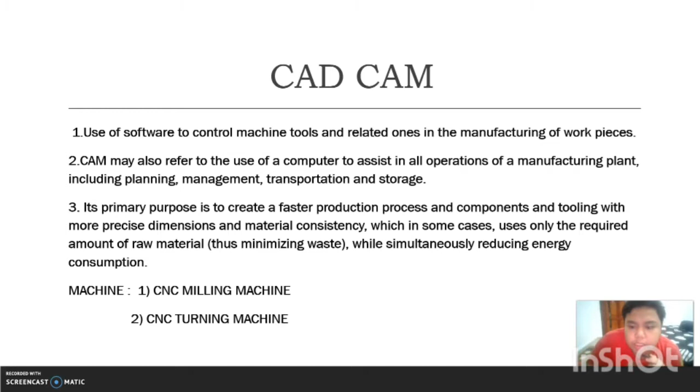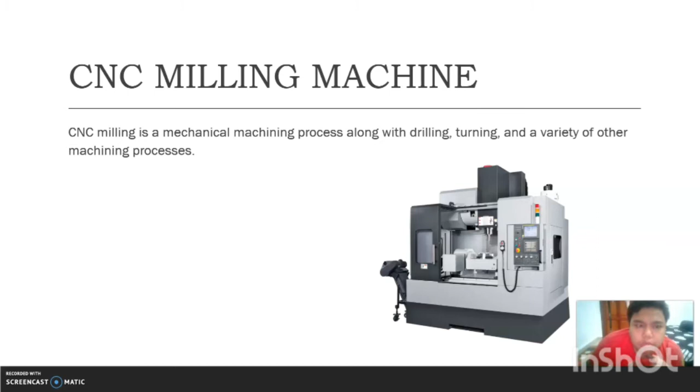So the machines that we have at CAD-CAM are the CNC milling machine and the CNC turning machine. The CNC milling machine is a mechanical machining process along with drilling, turning, and a variety of other machining processes. The picture shows the CNC milling machine. Next we have the CNC turning machine, a machining process in which a cutting tool, typically a non-rotary tool bit, describes a helix toolpath by moving more or less linearly while the workpiece rotates. The picture shown is about this CNC turning machine.

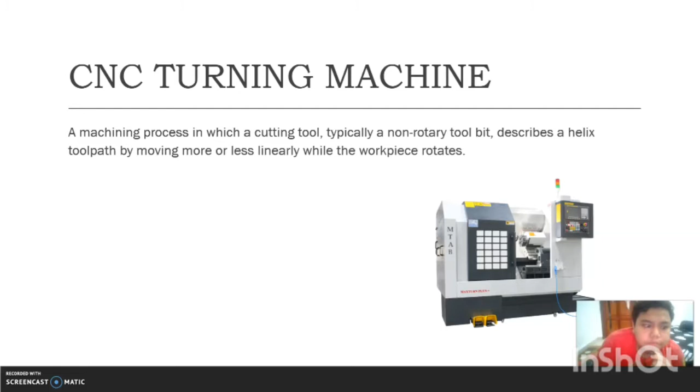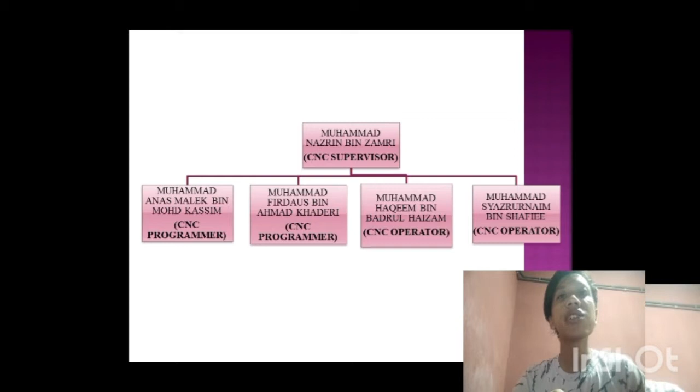My name is Nazrin Zamri, and today I want to present about the organization chart for the CNC milling machine. First of all, the first row of the chart is me, Nazrin Zamri, as CNC supervisor, and my fellow comrades Muhammad Kassim and Firdaus as CNC programmers, and Haqeem bin Badrul Haizam and Syazrurnaim bin Shafiee as CNC operators.

Next, the function of each position. The first position is the CNC supervisor. The first function for CNC supervisor is to supervise the CNC machinists. The primary duty of a CNC supervisor is directing and overseeing the day-to-day activities of a team of CNC machinists. This aspect of the role involves examining production schedules and deadlines, and determining how to best schedule employee activities to complete jobs safely and efficiently.

The second function is managing training and supervising processes. Most CNC supervisors train new hires on policies and procedures. This can include instruction and direct supervision on programming CNC machines, and ensuring that they operate safely and efficiently.

The next function is to maintain plant safety. CNC supervisors enact and monitor workplace safety measures. They may develop or use checklists or digital reporting methods to conduct machine or personnel inspections to improve reporting and hazard reduction processes, and prepare safety reports for plant managers. CNC supervisors also prepare incident reports and investigate issues if an accident occurs within the plant.

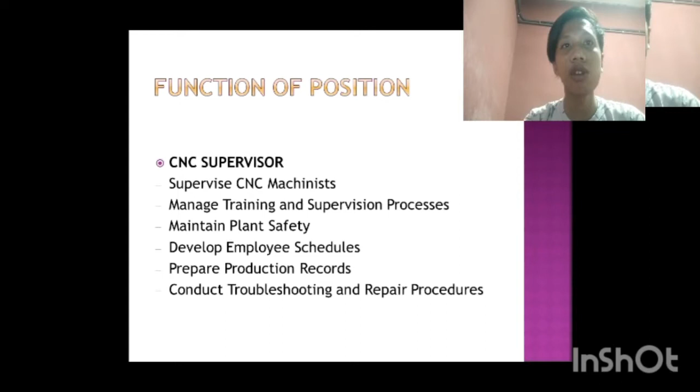Last but not least, the function for CNC supervisor is to ensure that machinery works as expected by taking part in troubleshooting and repair activities. This aspect of the role requires extensive familiarity with the machine parts and internal processes, as well as a keen understanding of how they work together, and to specify areas that may contribute to machine stoppage and slowdown.

Next, there are 5 functions of a CNC programmer. The first one is: the CNC programmer reads the blueprint design of the product to be manufactured and then sets their machine to produce the component. This requires familiarity with computer-aided design or AutoCAD software.

The second function is the CNC programmer writes the formula necessary to program machines and lathes using computer-aided manufacturing software. It involves entering tool registries, start and end points, offsets, and conditional switches.

The third one is CNC programmers coordinate with the purchasing manager to make sure their facilities stay stocked with the right amount of raw material to stay at maximum production.

Next, it is up to CNC programmers to make sure that their machines stay in top operating shape. They create and implement routine maintenance checklists and also perform basic troubleshooting when a machine malfunctions.

Last but not least, CNC programmers don't leave their machine as they enter the setting. They have to periodically check each machine to make sure the positioning of drills and mills stay perfectly aligned.

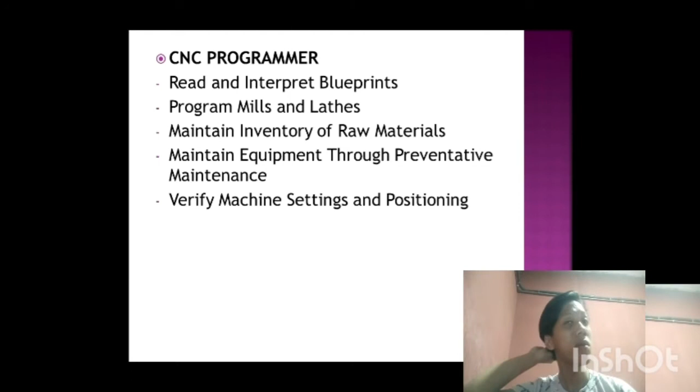Now I want to explain about CNC operator function. CNC machine operators need to study blueprints, specifications, plans, drawings, and parameters as detailed in a new work order to make calculations to program the CNC machine.

Next, CNC machine operators program mills, laser cutting, routers, punches, and other machines to manufacture the machine parts.

Then CNC machine operators prepare the machine for the manufacturing process. This includes checking the attachments and parts, taking measurements, making adjustments to precisely calibrate machines, and loading the feeding mechanism.

Next, maintain equipment. CNC machine operators maintain machine and equipment by cleaning and sharpening tools and components as needed. This includes ordering new machine supplies and replacing parts and tools.

Next, CNC machine operators need to inspect equipment for potential problems, safety hazards, and issues that may affect the quality of finished pieces.

The next function of CNC operator is that in any environment, CNC machine operators need to follow safety standards at all times and wear proper protective gear.

Next, maintain machine logbook. CNC machine operators need to record each time a machine is used, when parts are replaced, and other relevant information in the machine logbooks.

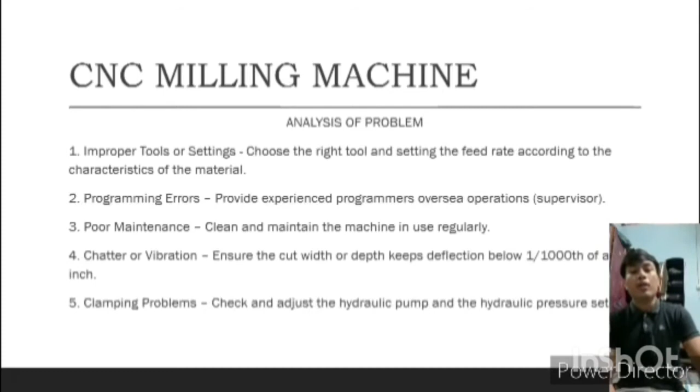Dirt and debris will build up on the equipment and affect the location and clamping of the part, and the output of the machine. This will cause reduced accuracy and precision.

The solution is we should clean and maintain the machine in use regularly. We should make it a daily routine.

Before we operate the machine, we should check if the machine is fully ready to use and in good condition.

The fifth one is clamping problems.

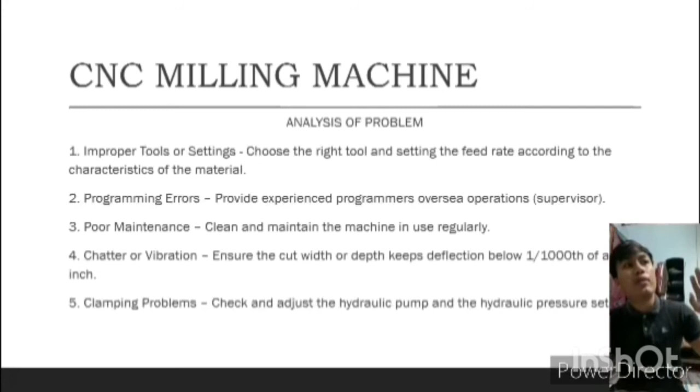The fourth one is chatter or vibration. Ensure the cut width or depth keeps deflection below 1/1000th of an inch. The solution also, we can check the RPM regularly when we operate the machine.

Next is maintenance strategy, which is divided into two topics. One is preventive maintenance, that is regularly performed on a piece of equipment to lessen the likelihood of it failing. If we do preventive maintenance, we can prevent breakdown maintenance, which costs more than preventive maintenance, and we also lengthen the machine lifetime and production.

The second one is corrective maintenance. Corrective maintenance is a maintenance task performed to identify, isolate, and rectify a fault so that the failed equipment, machine, or system can be restored to an operational condition within the tolerance or limit established for in-service operation. Corrective maintenance is like diagnosis. We examine the full machine and identify the wrong or broken part, so we can prevent breakdown maintenance or any accident that we don't want.

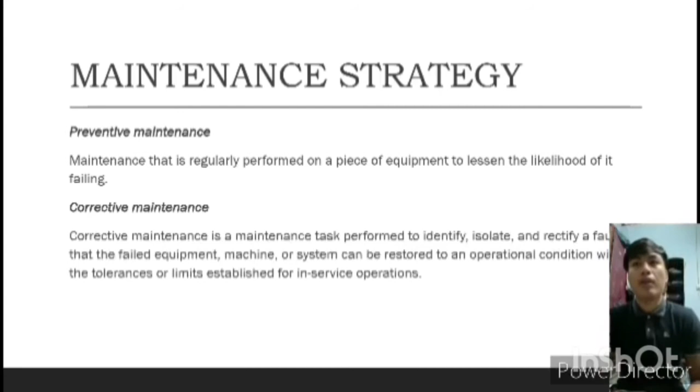The maintenance strategy has four types. One is run to failure, or we call it breakdown maintenance. Second, preventive maintenance, based on schedule. Predictive maintenance, which we call PDM, where we predict what part will break. And reliability centered maintenance, RCM.

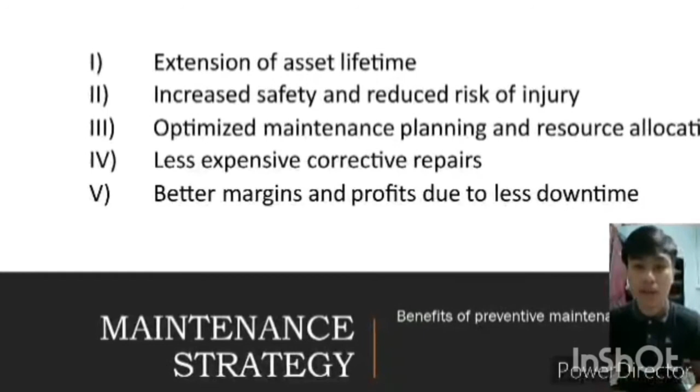Okay, next it will go on and proceed by my friend. That's all for me. Thank you.

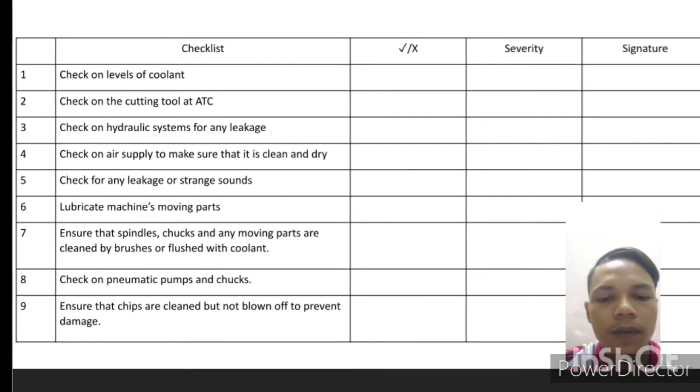Next, I am going to talk about the daily or weekly preventive maintenance checklist. As you can see, for the first checklist, we must check our coolant level and check the cutting tool.

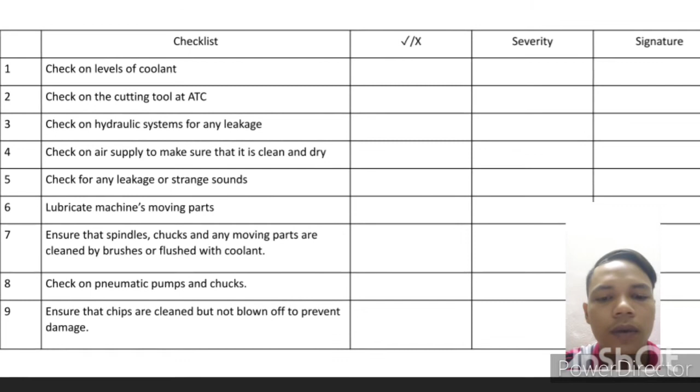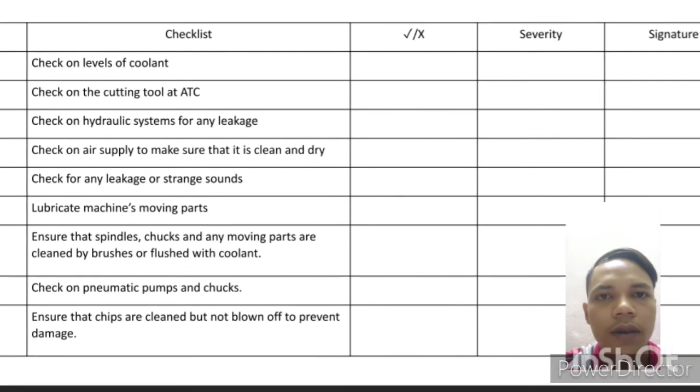For the next one, check the hydraulic system. For the fourth, check the air supply. Next, check for any leakage or strange sound on the machine. For the eighth one, check the pneumatic pump. For the last one, we must ensure that chips are cleaned but not blown off.

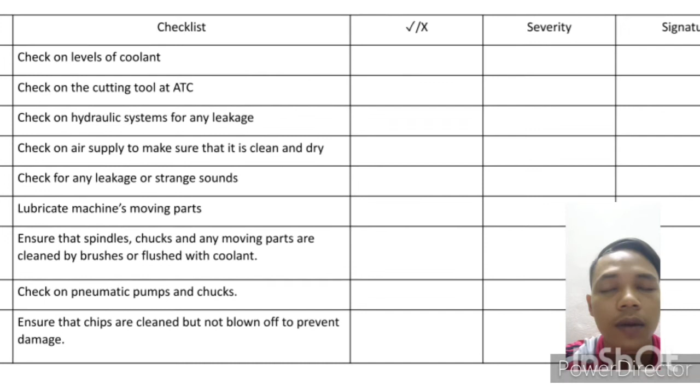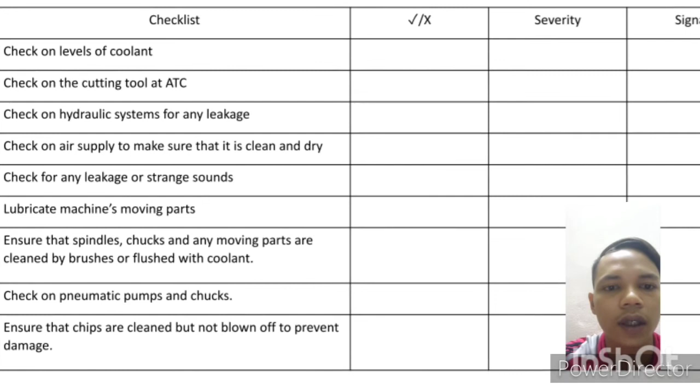And we must stick to the schedule, and note down the severity of the situation.

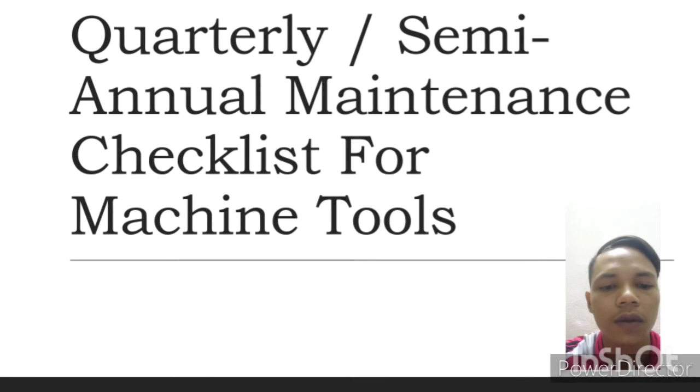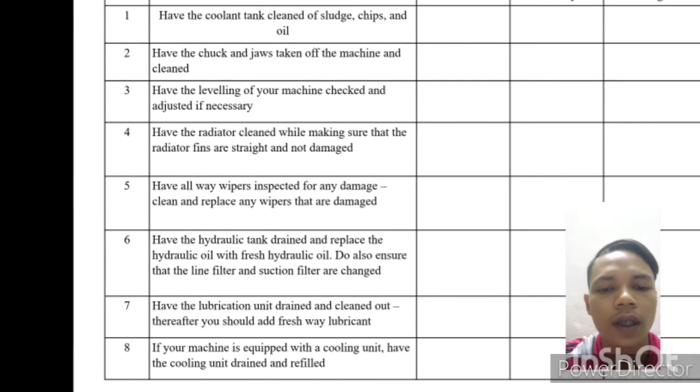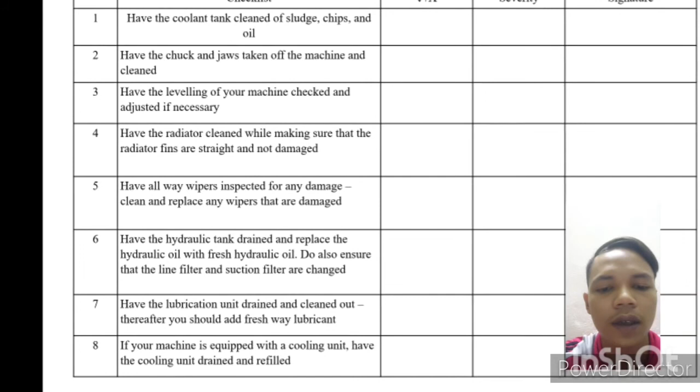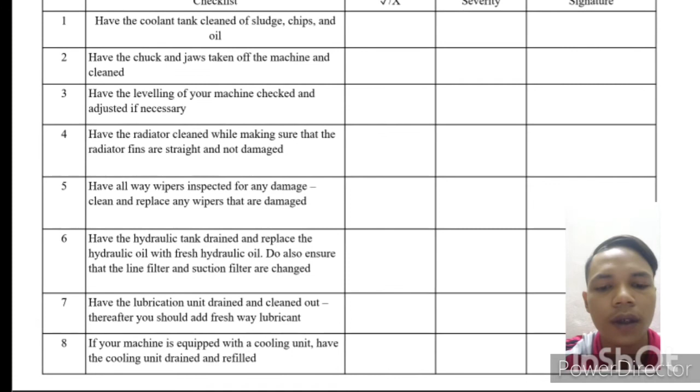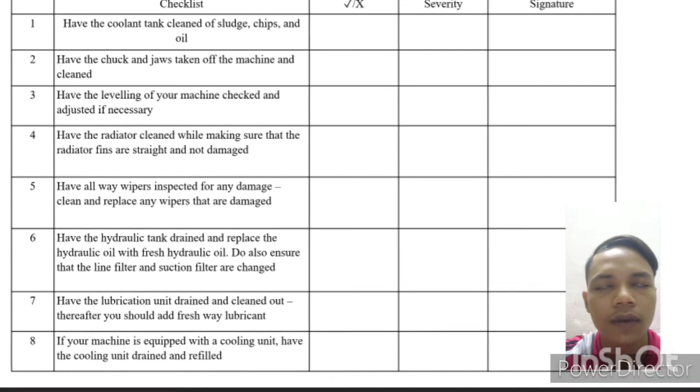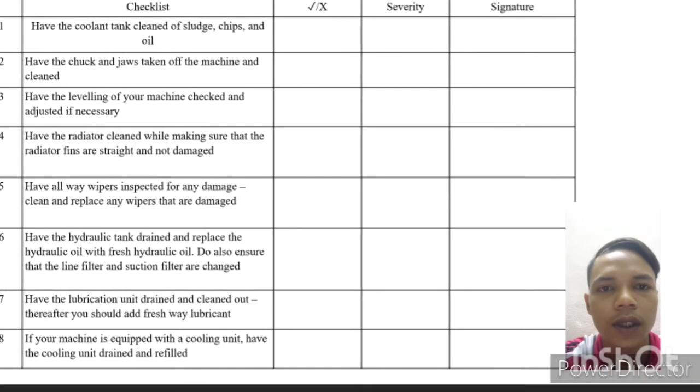For the fifth one, have all way wipers inspected for any damage. For the sixth one, have the hydraulic tank drained and replace the hydraulic oil with fresh oil. For the seventh one, have the lubrication unit drained and cleaned out. For the last one, if your machine is equipped with a cooling unit, have the cooling unit drained and refilled.

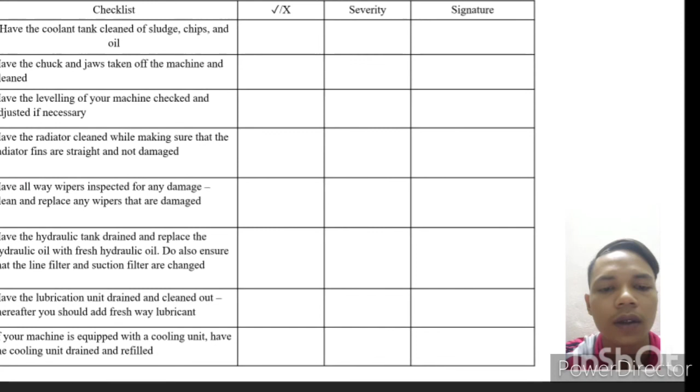Next, note down any severity or defect on the machine.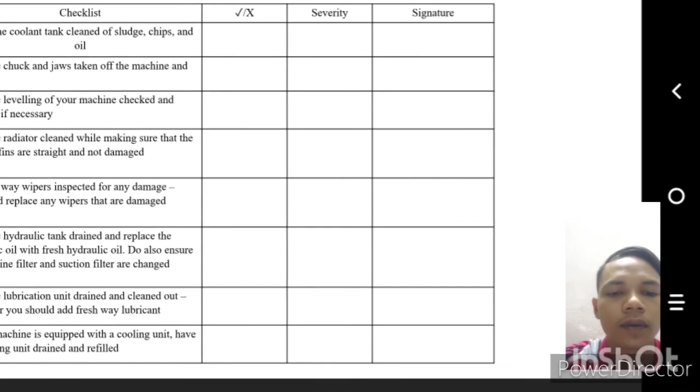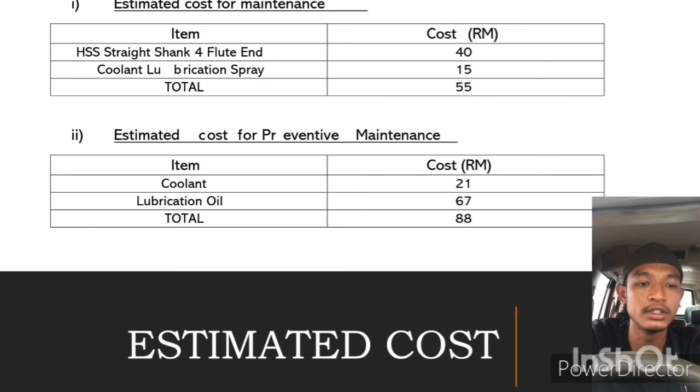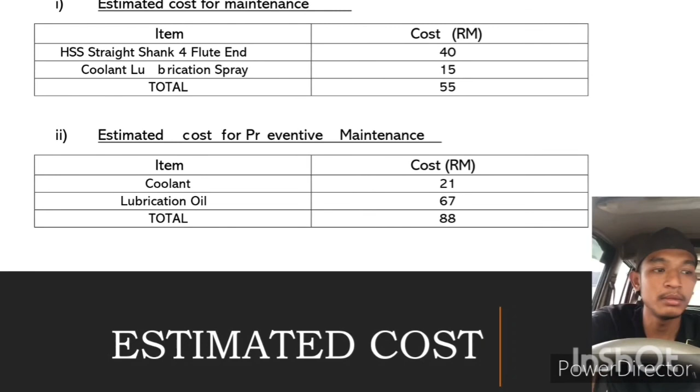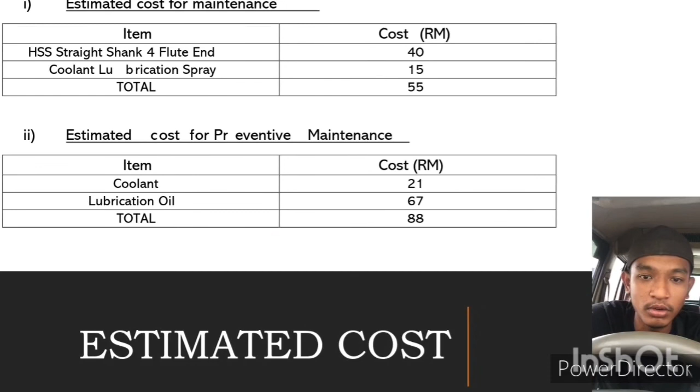So today I will present my subtopic, which is estimate cost for preventive maintenance. The coolant is 21 ringgit and the lubrication oil is 67, the total is 88. So the estimate cost for maintenance: the HSS shank 4 flute end is 40 ringgit and the coolant lubrication spray is RM 15. So if any part is broken and you want to maintain it, just add it to the estimate cost.

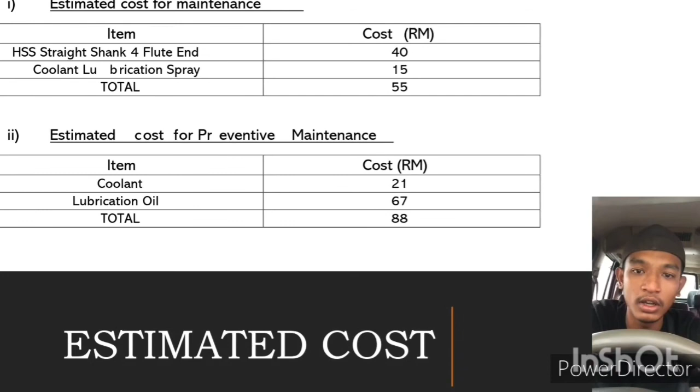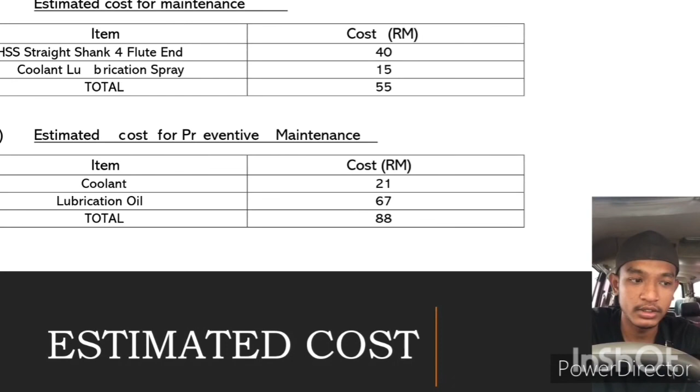But before that, you must add it into the work order, in the form, just add it in the work order. So that's it. Thank you.